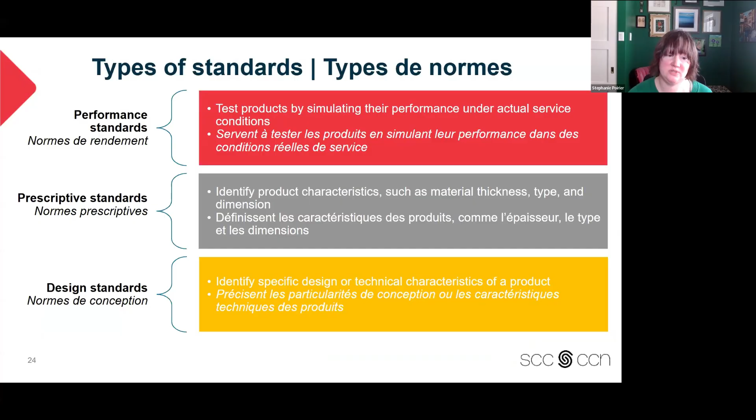And then you have something like a management system standard. ISO 9001 would probably be the most well-known of those.

Now, I don't know if you have ever run out of small talk with an acquaintance or a friend. Maybe you're looking for some interesting conversation starters. Well, you've come to the right webinar. We want to help you out with that. So next time you are talking to a parent at your kid's soccer game or you're at a boring dinner party, feel free to use one of these zingers.

The second one, did you know that National Standards of Canada are kept current by following a 5-year review cycle? That's right, because every 5 years, the National Standards of Canada are reviewed and either reaffirmed as is, updated with the latest practices and technology, or withdrawn altogether if they're no longer relevant.

And then finally, did you know the National Standards of Canada can reduce effort and time spent on planning, design, and implementation? Because standards can outline steps to follow and all kinds of provisions to take out a lot of the guesswork. So, something to consider.

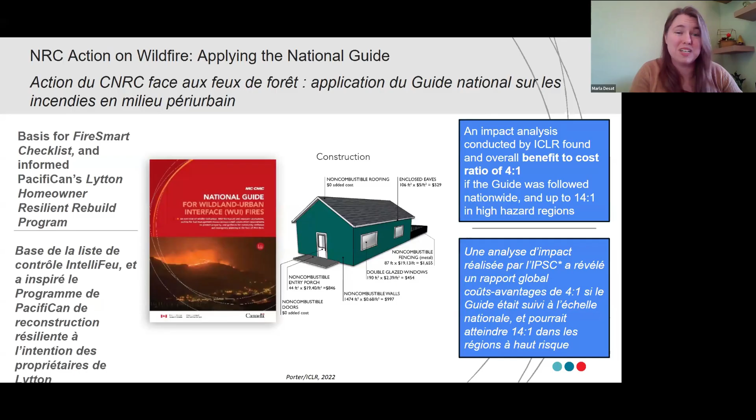Overall, it was found to have significant potential benefits if we were to put it into practice across the country. An analysis found it would have an overall benefit-to-cost ratio of about 4-to-1 if we followed these guidelines coast to coast to coast. And if you're in an area with high hazard for wildfire, that benefit could go up as high as 14-to-1 in terms of avoided costs.

And we're continuing to build on that document. Working with the Standards Council of Canada, we have new standards coming out based on this document—2 standards and 1 guidebook. These will be coming out next year, and by March 2028 at the latest.

There's a standard on community planning, resources, and outreach in these wildland urban interface areas. That's really more at the community scale, so maybe of more interest to people working with municipalities or other regions.

The second standard is specifically about fire risk mitigation in the structure ignition zone—close to the structure and at the exterior of the structure, what can you do in those spaces. Then there's an accompanying guidebook that will be published. What this does is take that big, detailed advice from that large guide on wildland interface fires and turn it into standards that are easier to follow and implement.

So it puts them into a format where you can go, yes, yes, yes, I've done what the standard says. I know that I'm meeting, that I've improved my resilience against these risks. So watch for those coming out in the next couple of years.

So with that, I'm going to move on to talking about some coastal flooding and erosion documents.

The first one I want to show you is another NRC published guidance document. Nature-based infrastructure for coastal flood and erosion risk management was published just a couple of years ago, and it's available. It and the WUI guide I was mentioning are both available in English and French. This is really a guidance document on how to integrate nature and nature-based solutions into your coastal flood and erosion risk management.

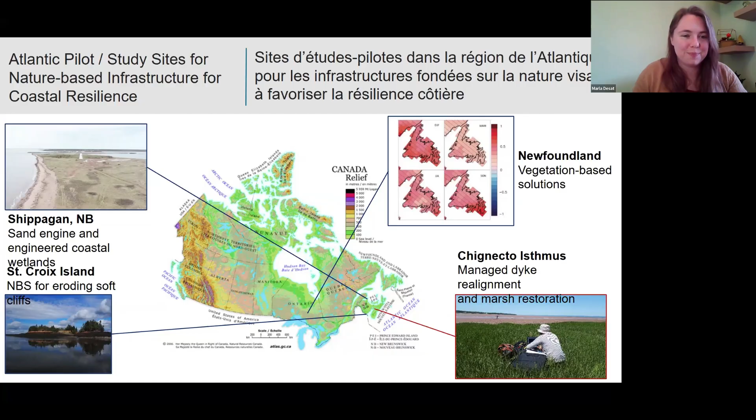So what does this mean for the work that you do? Well, leveraging standards is a little bit like following a choose your own adventure book. You can kind of go through and pick where you want to bring these in and apply them.

So if you've got a problem, if you're looking at how to protect your coastline from flooding and erosion, you want to understand first, where are you? What shoreline are you looking at? Is there any shoreline management happening? Have any assessments been done, and what is the specific coastal flood risk that you're facing for your structures or for the work that you're doing.

So you might apply something like the CSA W224 coastal flood risk assessment for buildings and infrastructure. You'll find that all the standards have extremely catchy names. But you might apply that to the work that you're doing. You might look at documents like there's a great document called Managing Rising Risks, Climate Resilient Shorelines. They'll help you look at options for dealing with hotspots and what you can apply here.

You might look at something like an equity guide on climate resilient infrastructure from that lens, applying that to see if there's particular parts of your project that have an outsized impact on one group over another. And as you're moving through evaluating how you want to address a shoreline, a coastal erosion issue, or a coastal flooding issue, you will need at some point to weigh your options and understand what the costs are.

And so there's a new document coming out in just a couple months, in June 2026, that looks at coastal options appraisal to help you with that stage. And maybe you need to dive deep on how you've decided that you want to look at restoring the marsh. Well, how do you do that? Well, that design guide I was talking about has case studies, has information that you can then reference and use to bring in and ultimately arrive at that successful point of achieving climate resilience for the work that you're doing.

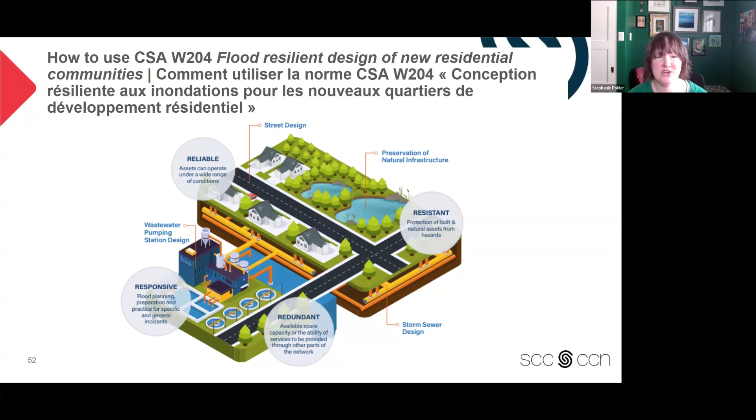Congratulations. Now we're going to shift gears and talk about high winds. You might be aware that the majority of Canada is at risk of high winds due to climate change. Fortunately, we have some tools to help with this, and the first one is a standard called CSA S520, Design and Construction of Low-Rise Residential and Small Buildings to Resist High Wind.

Very catchy title. This is an example of a municipality's needs or initiative driving a standard forward, as opposed to research or industry. Our story begins in 2017, 2018, with a draft of a new home construction standard sponsored by the region of Durham, Ontario.

The high wind provisions in this were basically modeled on requirements implemented by the city of Moore, Oklahoma, and adapted for the Ontario context. I don't know if you know anything about Oklahoma, but they're known for tornadoes, so they have a bit of experience with high winds.

Then in 2018, 2019, a foundational document was developed as a basis for a National Standard of Canada, informed by the home construction standard. This was developed by the Institute for Catastrophic Loss Reduction in collaboration with researchers from Western University, based on research, damage surveys, best practices, practical experience, and input from an expert stakeholder committee.

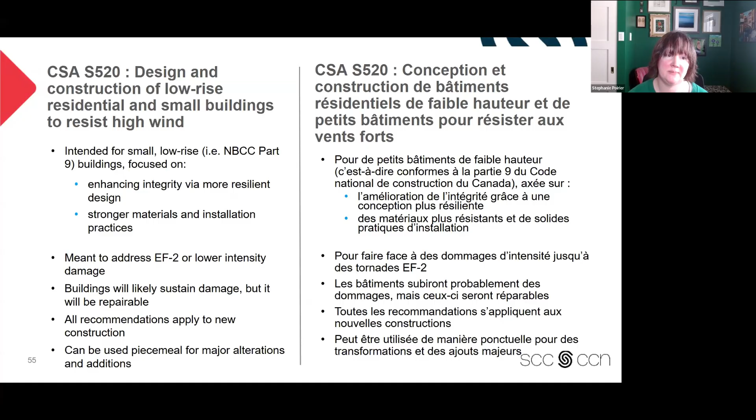Recognizing the vulnerability of roofs to high wind damage, CSA S520 highlights the importance of ensuring roof assemblies remain intact by enhancing connection of roof framing to supporting wall framing, installing roof sheathing with tighter fastener patterns or higher withdrawal-resisting nails than what's required by National Building Code Part 9, and also ensuring there's a continual vertical load path to the foundation.

It also recommends enhancing roof cover through application of wind-resistant materials with improved fastening, and applying an underlayment that will serve as a secondary water barrier in the event that roof coverings like asphalt shingles fail.

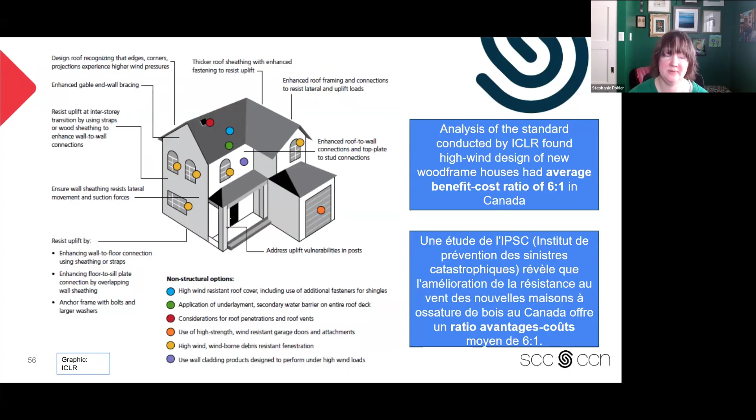I also want to draw your attention to that little box on the right side. We funded a cost-benefit analysis that the Institute for Catastrophic Loss Reduction carried out, and they found that high wind design of new wood frame houses had an average benefit-cost ratio of 6:1 in Canada. So, not nothing. And with that, I'll pass it over to Marla.

Thanks, Steph. So one thing I want to highlight here is a new task force established by the Institute for Catastrophic Loss Reduction and the Canadian Home Builders Association. They've launched their Resilient Homes Task Force to look at evidence-based solutions for resilience of new homes and renovations. This is really meant to be an extremely practical application of all the information we have available on these different hazards.

They've just recently published a set of tiered resilience guidance, and these are essentially checklists. They're really easy to use, you can open them up. They have a good, a better, and a best checklist for basement flooding, hail, high wind, and wildfire.

So they're super useful, super practical, and they're all informed by a number of the different standards and guidance we've talked about today. They're really distilling all of that information into these checklists to make them easy to use and apply. So if there's only one thing you go check out from what Steph and I are talking about today, I really encourage you to take a look at these, because I think they're a really incredible synthesis of the latest and greatest on how we can be more resilient to these specific hazards.

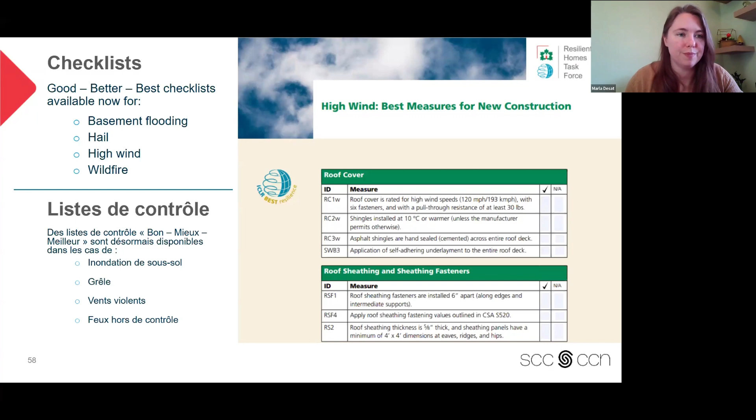Next up, I want to talk a little bit about heat and the risks we have from extreme heat under climate change. This isn't always the kind of climate risk that everybody thinks about, and it's not quite as catastrophic as severe flooding events or a wildfire coming through, but extreme heat events can be deadly. We've seen that the frequency and severity of heat waves is really increasing, even in places where we've historically had more moderate climates.

This is a problem where buildings and infrastructure have been built in a way that's more about keeping the heat in rather than keeping the heat out. So if you don't have an air conditioning system, you aren't able to make that change easily. If you haven't historically needed one, the building isn't necessarily set up well to have one retrofitted into it. And because of how the wall assemblies and the building itself have been done, it might be optimized for keeping us warm in winter rather than cooling us off in summer.

The really big concern with indoor overheating is that it has a couple of different definitions, but it's typically talked about as having an indoor temperature of 26 degrees or higher over an extended period, especially not being able to get any cooler than that overnight. When you're in this temperature for multiple days, especially while trying to sleep, that can cause significant health risks to people, especially elderly people with chronic illnesses. Children also have a harder time managing their temperature, so this can be a significant risk for people.

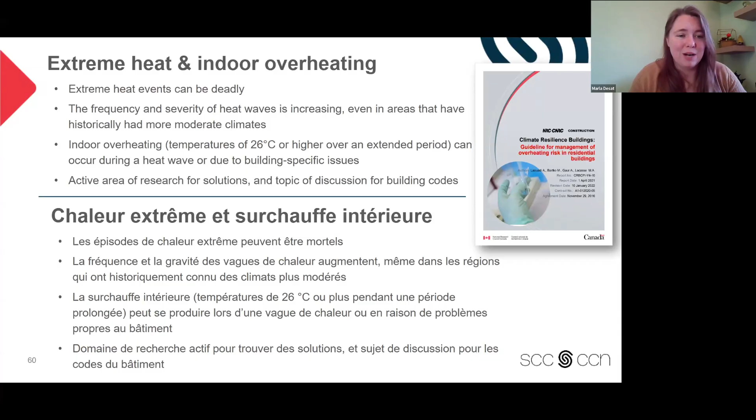And I want to mention one very interesting topic area and standard around this, which is on playgrounds. One of the really interesting pieces of work that's been done on extreme heat is around playgrounds, because the city of Windsor in Southern Ontario was a big leader in this. They did some studies because they have some of the hottest summers in the country, and they were finding that a lot of their outdoor playgrounds and parks were just not being used because they didn't have enough shade, or they didn't have water, and they became too hot to use during the summer, which is exactly when we want people being able to make use of these kinds of features and equipment.

So the standard that gets used across Canada for defining playground equipment, CSA Z614, now includes guidance on extreme heat and how to pick different materials, even just orienting the equipment in different ways, including considering the wind at that location. There's a whole set of design considerations you can bring in to help make sure a playground doesn't get overheated and doesn't have the risk of burns from hot surfaces and equipment, or not having any shade for people to sit and participate and use that space.

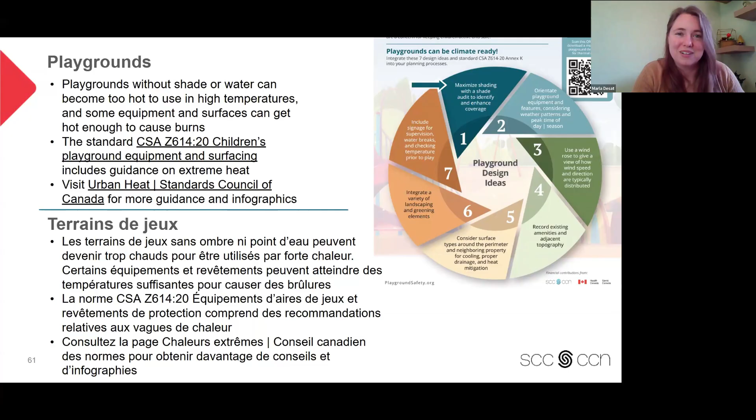There's been a lot of different studies and work on this. If you go to the urban heat section of the Standard Council's website, you'll see more of these lovely infographics and other reports and information on that. But it's a neat example of how we can change a little bit about how we design, to make sure that what we build we can keep using, and make sure it doesn't get abandoned in the height of summer, which is probably the worst fate a playground could ever face.

So with that, I'm going to hand it back over to Steph to talk about equity and to close us out. Thank you.

So we don't have time for a whole socioeconomics lesson, so I'll have to summarize. Basically, we're all at the mercy of climate change, but we're not all having the same experience. Due to a variety of factors, some of us are a lot more vulnerable. Climate change is what's known as a threat multiplier, so it exacerbates social problems that are already happening.

Some of us are going to be more impacted because of where we live. For example, the north is warming three times faster than the rest of the world, and northern communities, along with rural communities and racialized communities, tend to have underinvested infrastructure. And some people are more impacted because of who we are. For lots of reasons, women, people of color, seniors, and people living under the poverty line are disproportionately affected by climate change. So I'm going to give you an example.

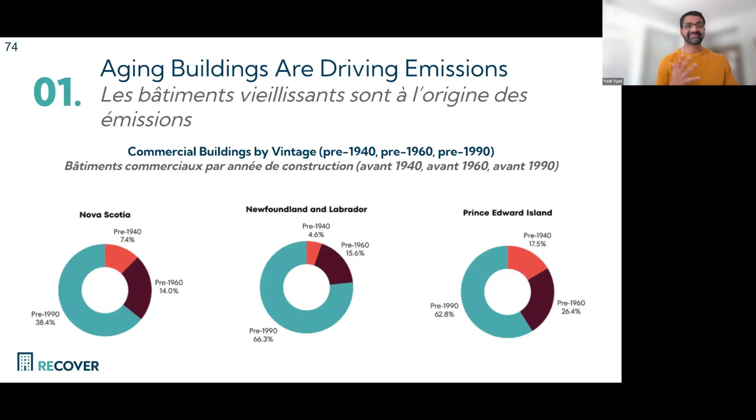I have a few stats here which tell you the makeup of buildings historic of the 1990s. As you can see, in Nova Scotia we have close to 40% of our building stock, but when you include the 40% plus 14% plus 7%, you end up getting around 60% built prior to 1990. That's pretty darn high.

Second thing: cut cost, cut emissions. It's really simple, right? Energy prices keep rising, and emission prices and impacts due to emissions keep getting severe. What we really have to do is deep retrofit — we can cut energy pricing and have a better environment and a better indoor environment as well.

A recent study actually shows that we spend more than 90 to 95% of our time indoors. And if our buildings are filled with asbestos and poor indoor air quality, you can imagine what it will do to your long-term health. This is not just about rate cuts and emission cuts, but also about the human factor.

It is one of the hardest sectors to decarbonize. The reason behind it is that everything intermingles into one another — there's material sourcing, climate, people, and existing building stock and infrastructure. Then there's also what we consider necessities, like water, that also intermingles with this whole infrastructure. It's one of the reasons why, when we think about our national-level targets, if we don't pick up our game with respect to deep retrofits, we won't hit those.

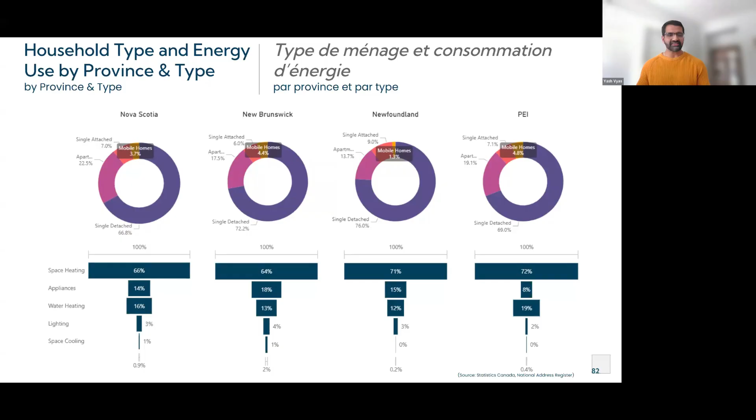Essentially, by retrofitting the building, we can reduce space heating quite a bit because we'll have an improved heating system, improved window systems, and improved wall and roof assemblies. These are certain factors that we can improve drastically.

Let's look at energy use and fuel type within Nova Scotia and the Atlantic region to understand what we're getting ourselves into. In terms of total use, Nova Scotia has a lot of heating oil, and that corresponds directly to the amount of GHG we produce. So there's a relationship between what type of energy you use and what type of greenhouse gas impact we will have.

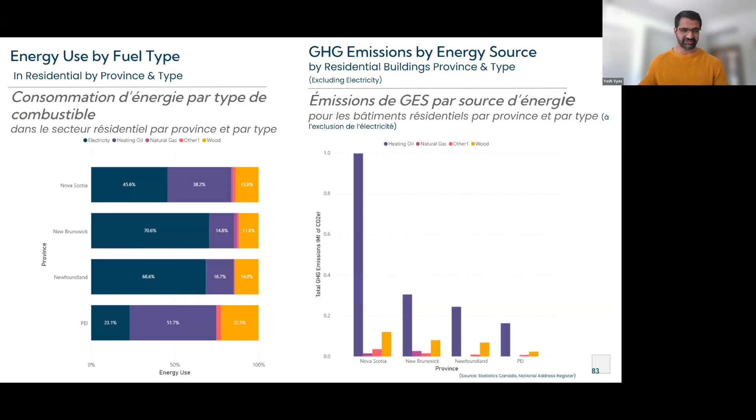What I'd like to say is that the situation we're in within Nova Scotia, there's a good chance for improving our system, and we make that better through deep retrofitting. The more we conduct deep retrofits, the lower emissions we have. The lower emissions we have, the better lifestyle we get overall, from indoor air quality to outdoor air quality, and just in general.

So let's take a closer look at Nova Scotia itself. The reason we're doing that is because when it comes to public open data sets, Nova Scotia is slightly better. All of these graphics you'll see for the next 6 slides are all dashboards which will be published on Recover's website. Once again, if you go to recoverinitiative.ca and sign up for our newsletter, you'll get an invitation to use all of the dashboards.

So when we're looking at Nova Scotia itself and we look at the breakdown, we have residential building stock at almost 90% of our building stock.

When you break that even more down, single detached homes are the most dominant category. So coming back to the sector, we're looking at deep retrofits. How do we create bigger impacts? We have to figure out how we could deep retrofit these single homes as quickly as possible. But if we're looking to make a mass difference, we have to look at how we could make a difference onto the multi-unit homes.

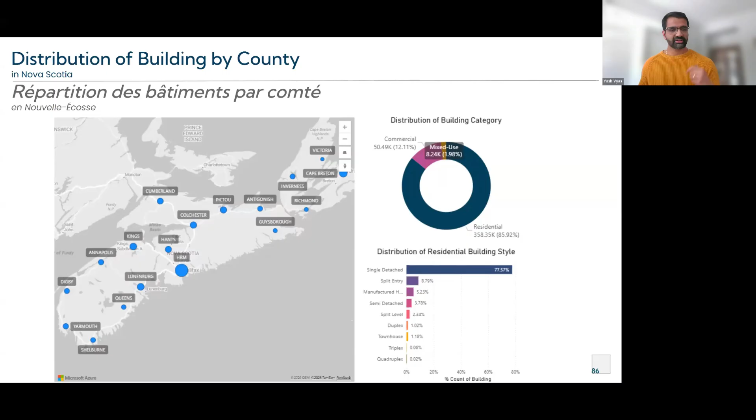So let's look at distribution by building category within Nova Scotia. You'll notice that if all of this were quantified into single bubbles, these are just dashboards that all of you, if you ever sign up, will get an instance to play around with.

The HRM region has the highest number of buildings that we have. So what does that actually convey? When we look at building construction and population growth, the amount of buildings we're constructing isn't necessarily increasing. In fact, even the square footage we're constructing is not increasing, but the population has kept on increasing over time. That leads to more population than the number of households available, which creates a much larger housing demand.

Why does this matter? If we're thinking about deep retrofits and how we should conduct them, and if our population keeps rising but construction doesn't keep up, we'll get into big trouble where we won't have enough money to construct new buildings and conduct deep retrofits at the same time.

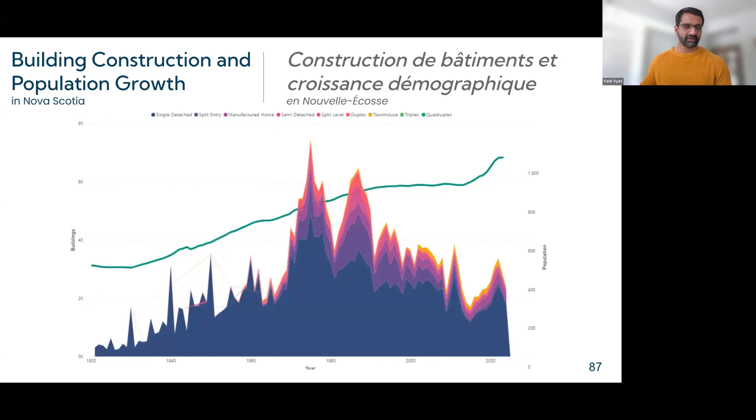Let's look at the building stock itself in more detail. This is the construction residential type by PVSC and how well rated they are. Most of our buildings are rated as average, and by average it means that it's livable. It doesn't mean it meets today's code or exceeds today's building code, it's just livable.

That's staggering if you look right across the board, left to right, into the different types of buildings we've had. Specifically single detached homes, the largest category, also have the highest percentage of lowest rated houses. When you break this up further by decade of construction, you can easily see that as we get closer to the 2025 range, our buildings are not necessarily rated better. It's staggering when you look at that data.

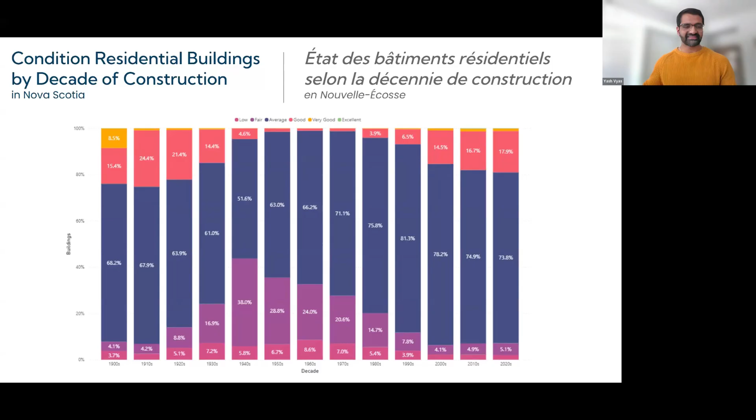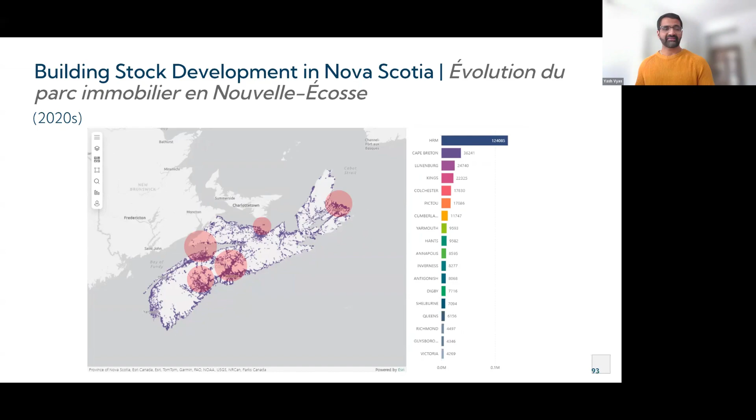So what are our opportunities and what are our barriers? It's not all just bad news, right?

It comes with the bare bones of opportunities. So when you're looking at the opportunities, it's GHG reductions, energy efficiency, energy saving and disposable incomes, increased property value, reduction of maintenance cost, resilient safety, improved health and comfort, and reduce energy poverty. Those are all the opportunities we can take a step into. And the barriers we have right now are high capital, insufficient funding, lack of holistic programs and efficiencies, and supply chain vulnerability. Where Recover stands is we want to emphasize the opportunities and remove barriers to the best possible extent, such that we could create programs that work.

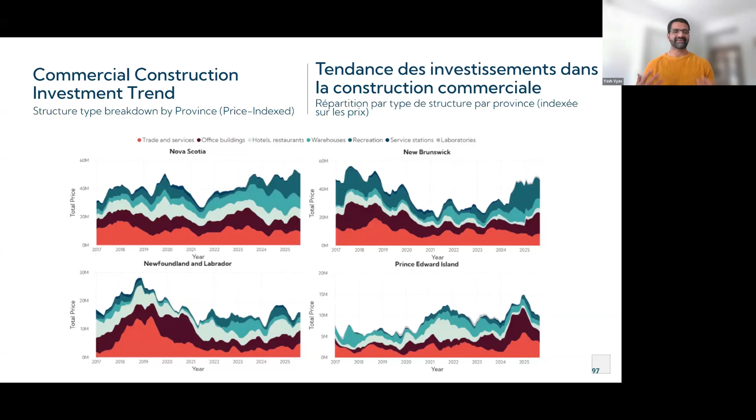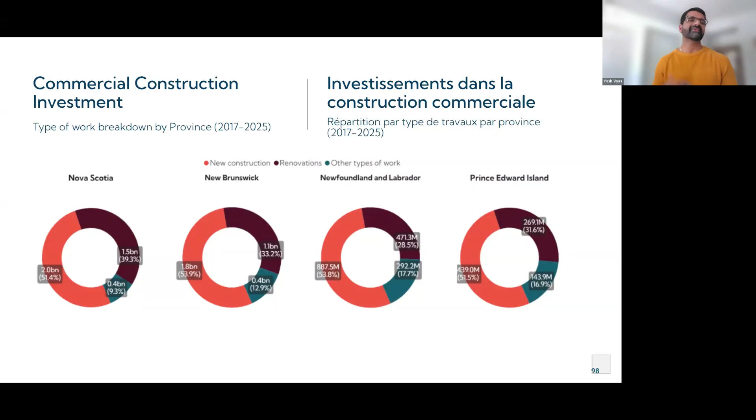When you look at this right across the sector, you have new construction as one of the most dominant areas where buildings are being funded, and renovations are the second largest category. You can see on this list, retrofits are not even on the list. So we are just maintaining our buildings or building new buildings. We're not really retrofitting them, and that will amplify the problem over time.

What is our pathway to scale? The pathway to scale is public investment, finance reform, workforce development, data access, and coordination between all the different parties. I do emphasize workforce development as much as possible because it could really impact us in the near future.

Unfortunately, I'm still over by 2 minutes, so I apologize for that on a Friday late afternoon. But all I want to say is every building that we retrofit today has a legacy of resilience we leave for tomorrow. The deep retrofit revolution starts with those bold enough to act now. And we do need to act now, and it's actually proven by our data to move forward.